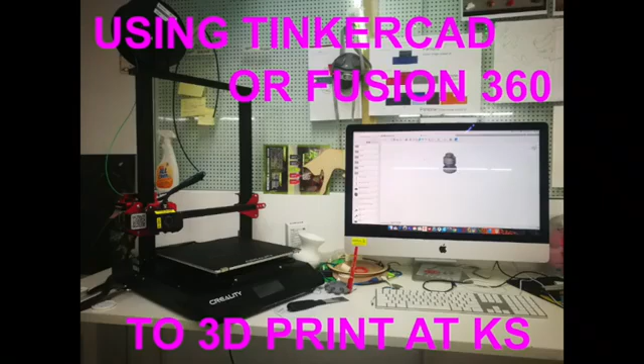So I am just going to talk you through making a chess piece in the two softwares that we've got available. They're both from Autodesk, and one is called Tinkercad and one is called Fusion 360.

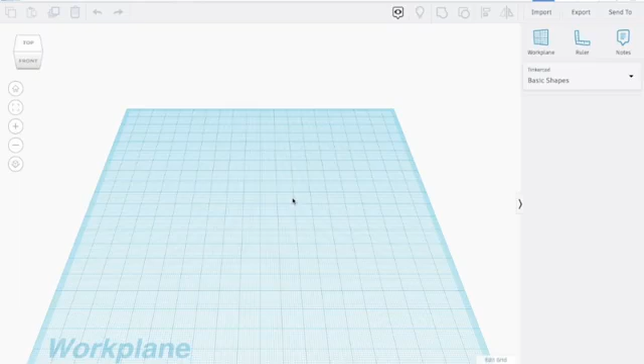Tinkercad is like a basic version of Fusion 360. So this one, you can drag and drop. If you're going to create a new design, click on create new design. This is online, so you're working online. So basically you're dragging shapes in and resizing them. You can type into here.

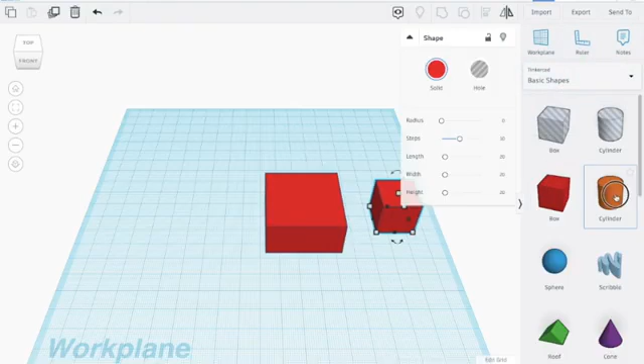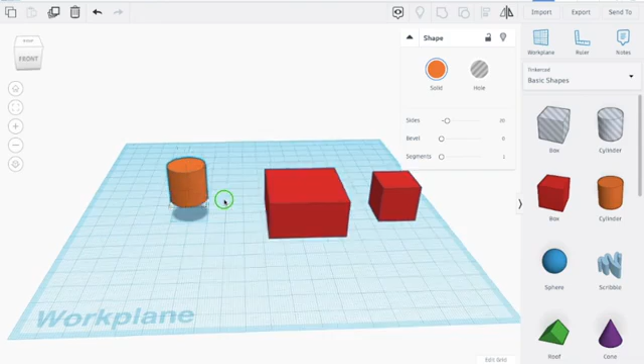And then if you want to add something to this or take it away, then you need to grab other shapes and bring them in. So you can adjust heights here, sizes here, and you can make it go up and down by grabbing this cone shape. So this one is simpler, but it's not as good for arranging or making more complicated shapes.

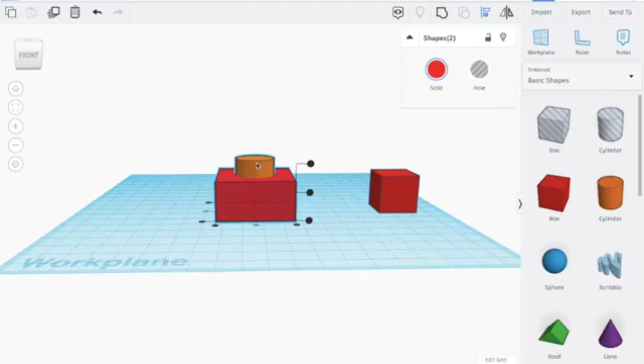If I wanted to put this and this together, the simplest way to align it is to use the align tool, and that will put it directly in the middle. If I wanted it to come up, I grab the cone and I can adjust it, and then I need to look carefully at where it's going to go. You can see it's just inside.

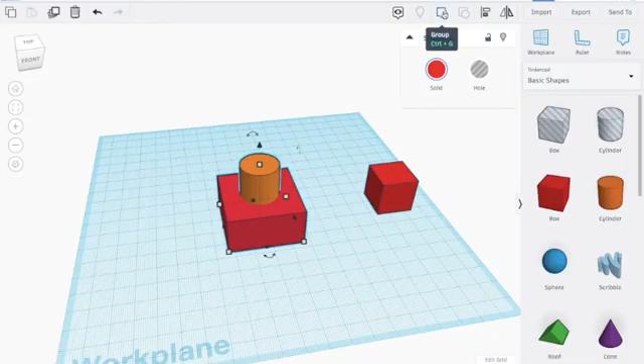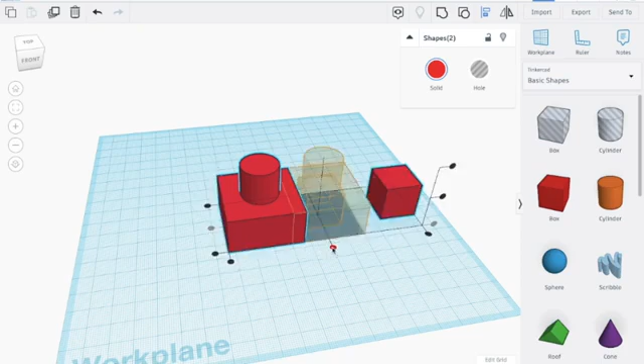So what I'll do is I'll try and join these together. I select both of them and I go to the join tool here, group. So remember, this one is for aligning, this is for grouping, this is for ungrouping, this is to mirror. If I wanted to put this one and this one together, I would join align, and then I can put it in the middle there, and I might try and put it on the top.

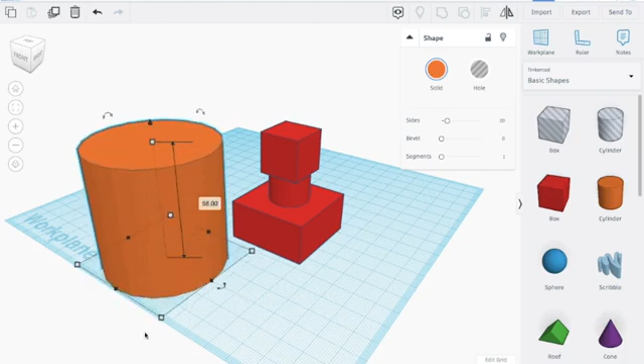So let me try and select this now and just drag it up. So I can make a figure, or I can make some kind of character like this. I can do the same with the circle. If I hold the shift key down, then it keeps it locked. If I don't want it to be locked, I can just not hold the shift key down. So I can build up characters doing that.

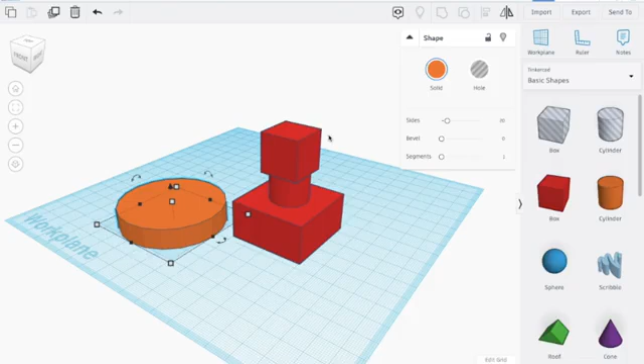Okay, now if I want to use it on the 3D printer, I need to go to export, and I need to export it as an STL. Now I don't want all of these things, so I can either get rid of what I don't want, or I can just select what I do want. The selected shape, STL, and it calls it funny names. So I'm going to take this and I'm going to just put it here, and we're going to use that later on.

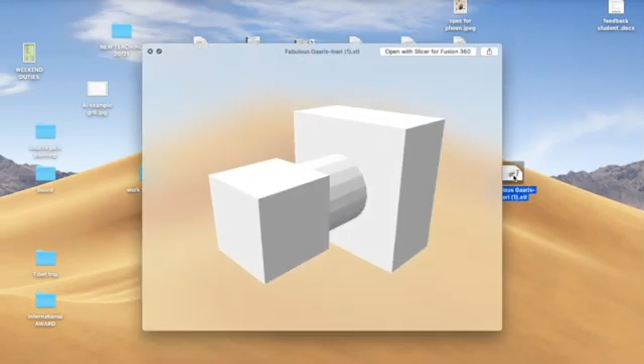Okay, so the other way of doing it is to use Fusion 360. This is a more complicated piece of software, but once you've learnt it, you can do much more with it. So first of all, you have to realize that you're drawing flat shapes and then you're extruding them, you're pulling them out. So if you look at this box here, these are the X, Y, and Z.

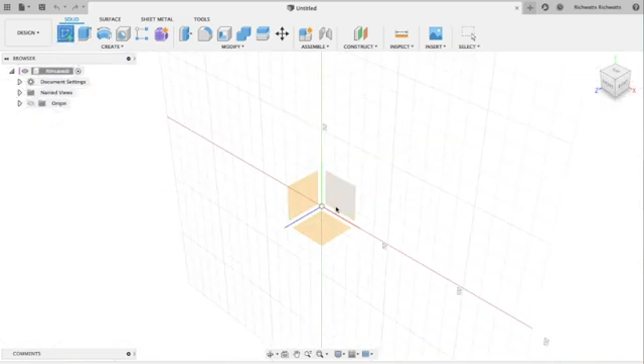The first thing you're going to do is you're going to create a sketch. You're going to create a flat shape, and it gives you the option of where you're going to draw it. So depending on what plane you want to draw it on, now I'm just going to draw it on the bottom one. And I want to draw a circle, so I'm just going to use the center. And then I can put in there an actual figure. So if I was doing a chess set and I wanted all the figures to be the same size, then I could easily do that.

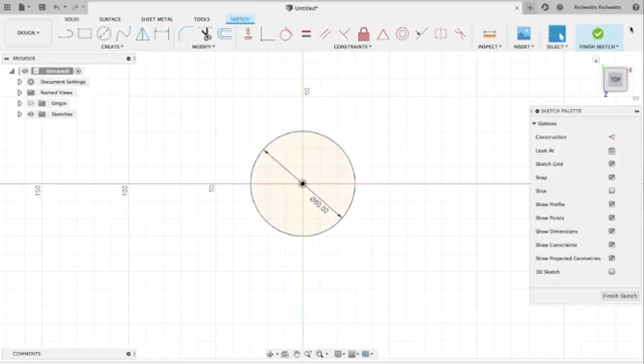Then I have to finish the sketch, so it's just a simple circle, and then I'm going to extrude it. I can drag it up and down, or I can write in a number.

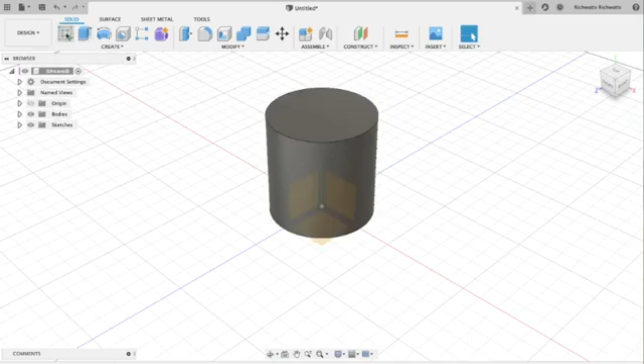Now I want to turn this into more of a three-dimensional shape. So I'm going to think what I need to do. I'm going to make a rotation. I'm going to use the template and cut it out going around in a circle. I'm going to draw a line that I want it to go around to begin with. So that is the center. Can you see?

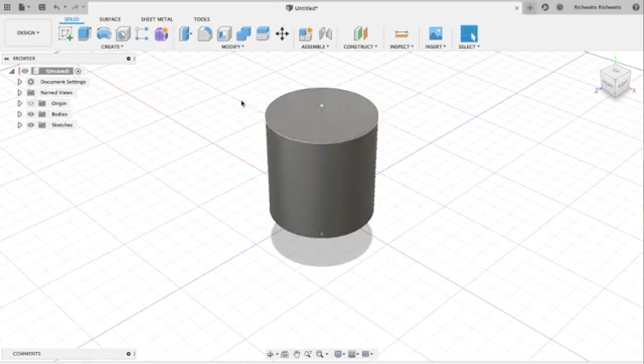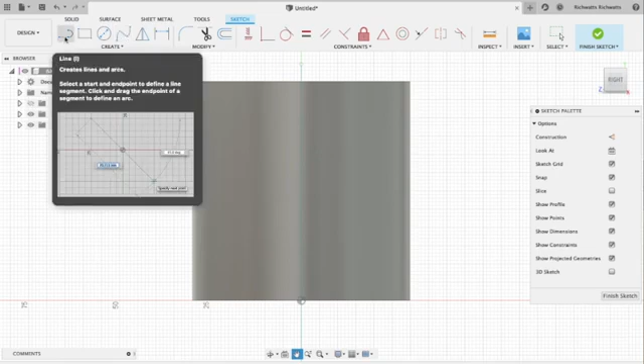Then I want to draw a shape, and I want it to be - I drew on this plane before, I want to be on a vertical plane, so I'm looking at the side of it. And then I'm going to draw using, I can either use this one, which will give me more curved lines, or this one, which will give me more straight lines and points. So it depends whatever you feel comfortable with. So I'm just going to roughly draw something that might look like a chess character. It jumps around a bit, so maybe you can adjust your grid settings to get what you want.

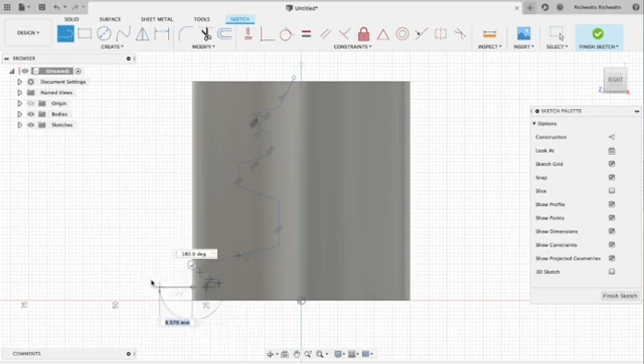Okay, I'm going to come back to the start so it joins up with this. And you can see that has made a shape that I want to cut out.

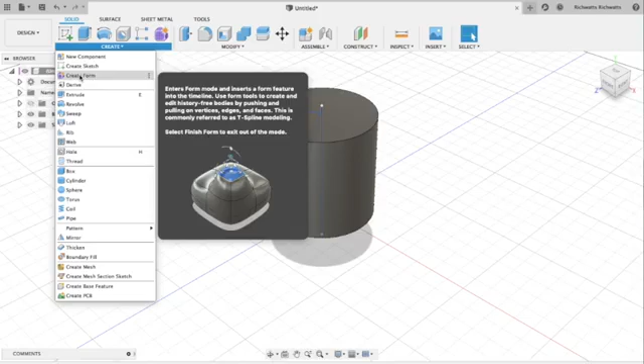Can you see that? So then I'm going to go to create and do a revolve. It's going to use the shape I've just created, the profile, and cut out everything around that. So I need to select the axis it revolves around, which is the line we drew earlier.

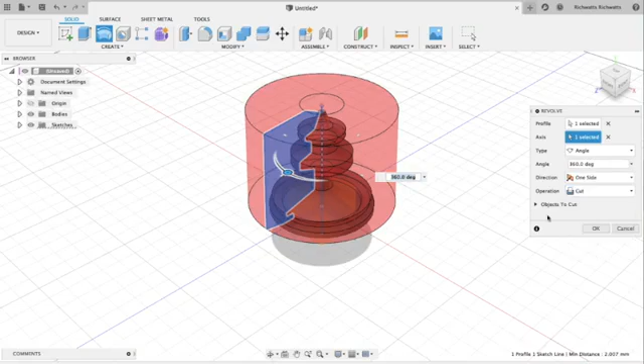And you can see it's already cut everything. So I can say cut, join, intersect. I'm just going to cut it. So that then is a chess piece.

Now I can do different things with that. If I wanted to make it a hollow shell, I can do that. I just select it, and if I say I want a 3mm shell on the inside, then I can check this.

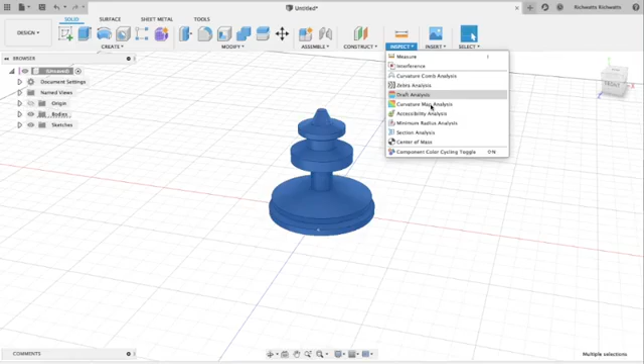So you can see I have made a hollow shell. So that won't take so long to print.

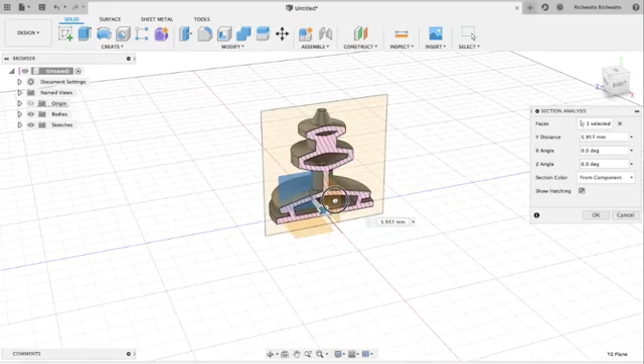So what I'm thinking is, as you're printing, you need to think how is it going to print, how long is it going to take, and how much plastic is it going to use. So you can see this is hollow, so it should print a little bit quicker.

I don't want this to stay, so I'm just going to cancel it.

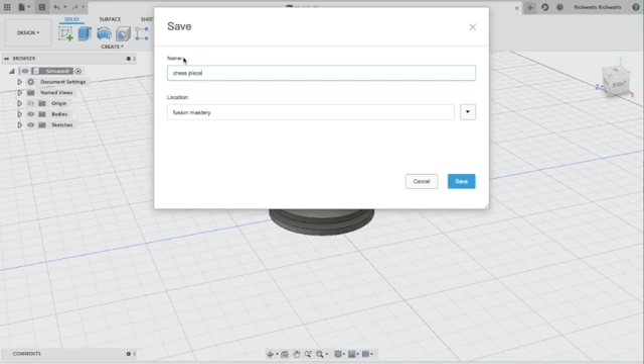Right, you need to save it. So I'll save it as chess piece. It'll take a little bit of time to save because it saves to the cloud.

And then you need to export this again as an STL file. So you go to export, chess piece, and drop down the menu. The bottom one is STL, and it will save to wherever I choose, and this is desktop.

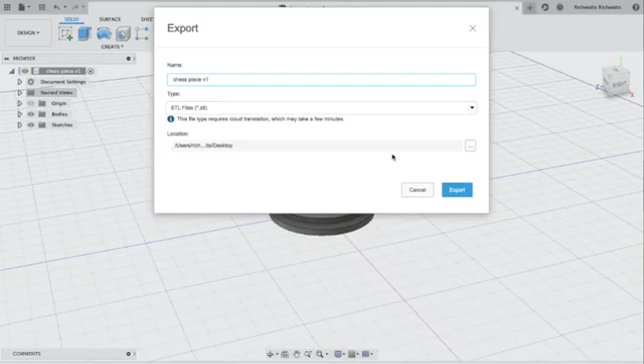So this is now downloading, and you can see it takes a little bit of time. So you can just wait for that to download before you can use it.

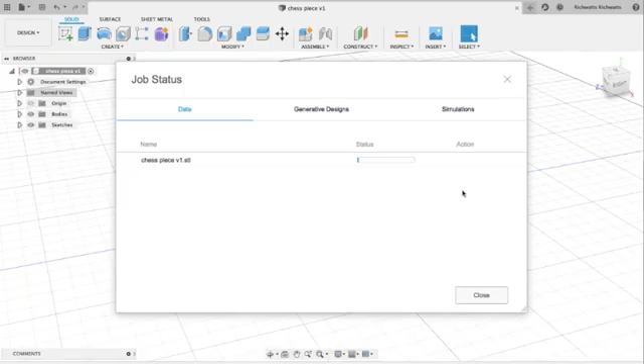Okay, so as that is downloading, I'm going to tell you what to do next. So these are the STL files. The other one will pop up on my desktop.

Right, you're going to use one of two software. You're going to use this one called Ultimaker Cura, and that is for the Creality machines. Then the Repetier Host is for the Colido machines. So depending on what machine you're going to use, it depends on what slicer you're going to use.

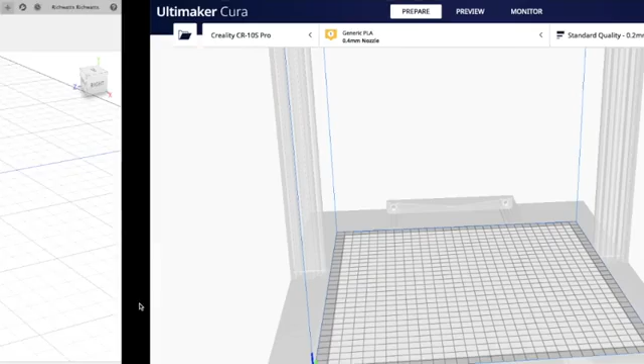So you open up the slicers. Ultimaker Cura is this one. So when that file turns up, we will then use that. And then this is Repetier Host.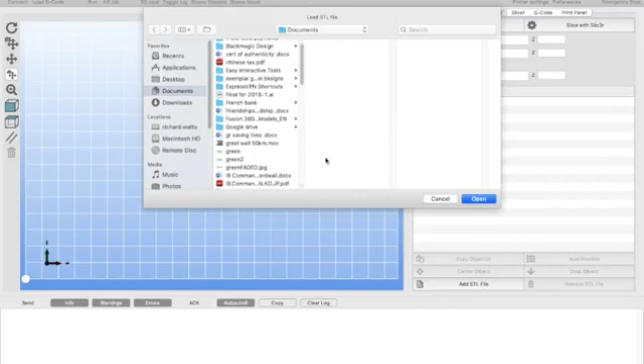Right, the first thing you need to do is add your STL file. So it was on my desktop. Here we go, this one.

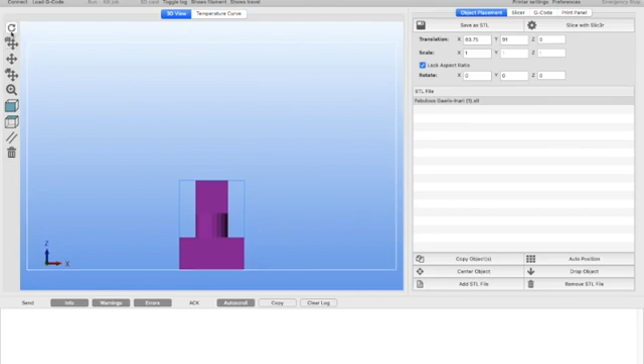So when you import it, it might come in a strange position. If it drops down and comes in upside down or sideways, then you're going to have to rotate it. If you type in 90 degrees, you can see it turns through 90 degrees, or 180 will be upside down.

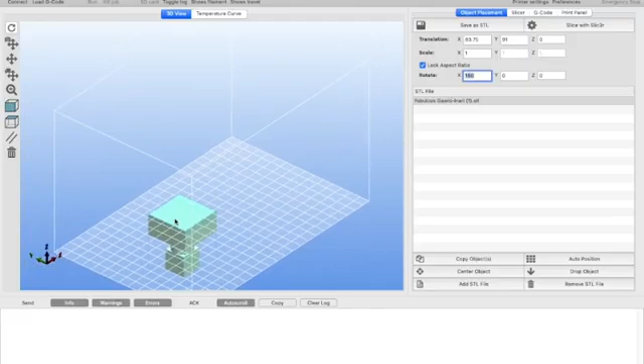You can see this is under the bed, so you need to drop object and maybe center the object so it comes into the right position. Okay, I don't want that, so I want it to be up the other way because I want the base to print first. You've got to remember to click on the thing you're going to change.

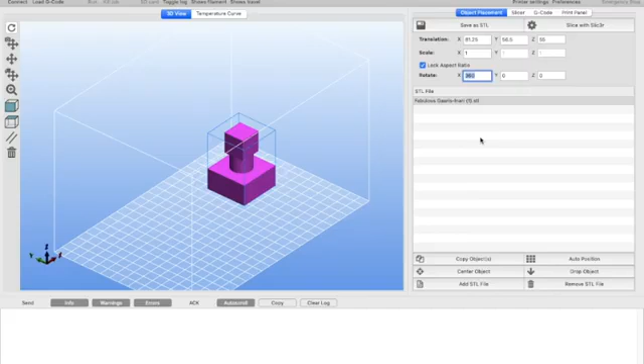And then, okay, so I've had to turn it right around again. Right, it's in the middle of the air, so I'm going to drop it. No, not copy — I want to drop the object and center the object.

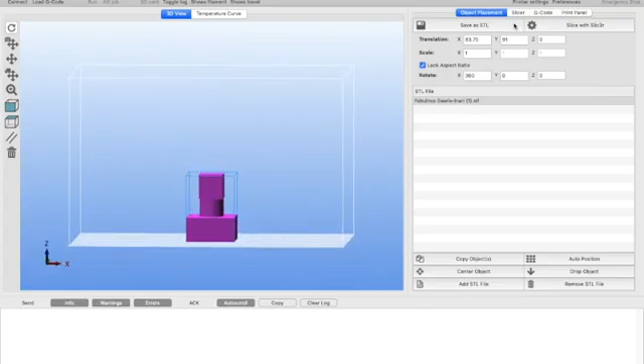Okay, so once I've got it as I want it, I will go to slice. So it's doing the Gcode and it has sliced it, you can see there.

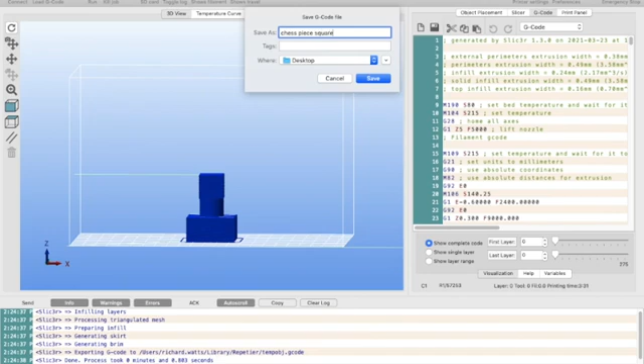Then I need to get the Gcode from the slicer, so I save it. Just save as something so you know what it is. Then that will save to my desktop. There's the Gcode — this is the code you're going to use for your 3D printer.

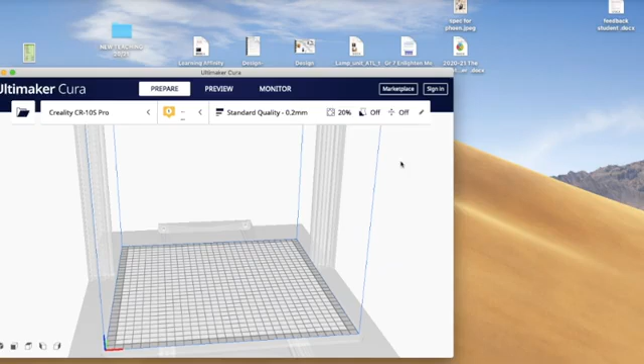Right, this is the other chess piece. So we're going to use Ultimaker. This is a lot easier, you just drag it in.

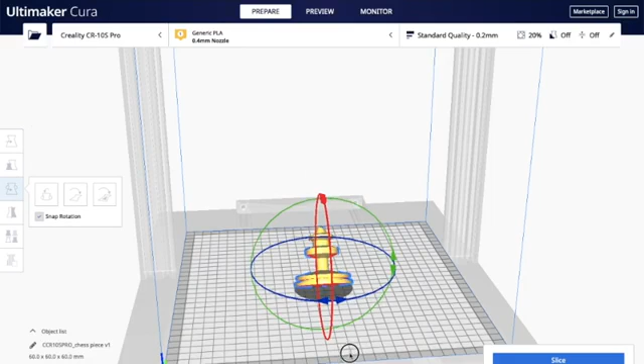When it's in there, you obviously want the base to be on the print table. So you select it, select rotate, drag this around, and it will automatically go into the right position. It'll automatically drop. Okay, so that is your chess piece.

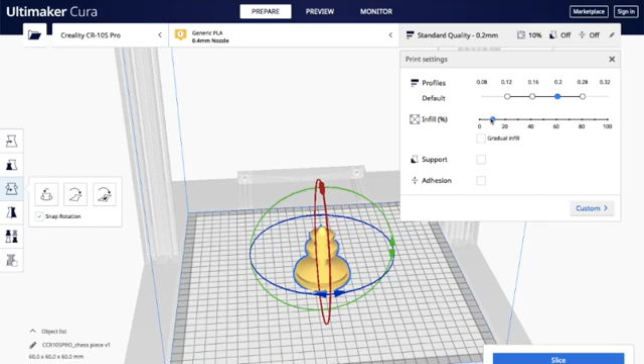This one is a lot easier to change things. So now the amount of fill it has will determine how long it takes, and also if you've made it into a shell, so if the middle bit's hollow, you'll use less plastic. So we can reduce the amount of fill here. I'm going to do 10%, and then what I would do is press slice.

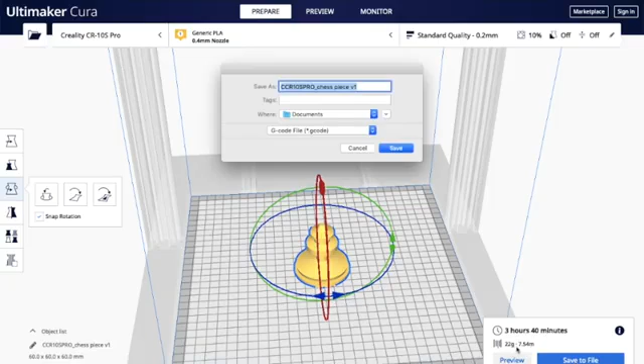Save to file. If your computer is plugged into a 3D printer, it will say print via USB. So it's going to take 3 hours and 40 minutes, and it's going to use this amount of plastic. This is where it's going to save.

I want to save it on the desktop. And again, it's saving as Gcode. Let's see if we can find it. There we go. So those are your two options for 3D printing.

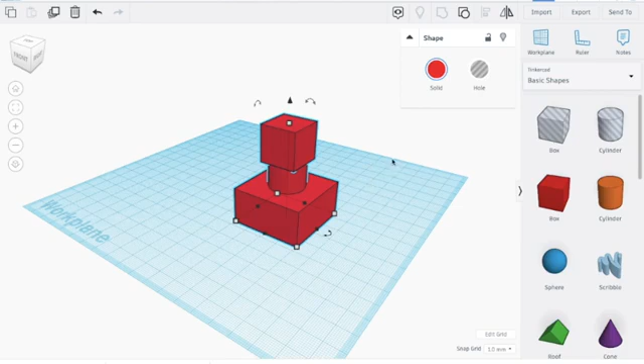So drawing using Fusion 360, which is a more advanced and better option, or drawing using Tinkercad. Remember, you have to export both as STL files, and then you have to use them in either Repetier Host or Ultimaker Cura to make your Gcode, which you can then 3D print from.